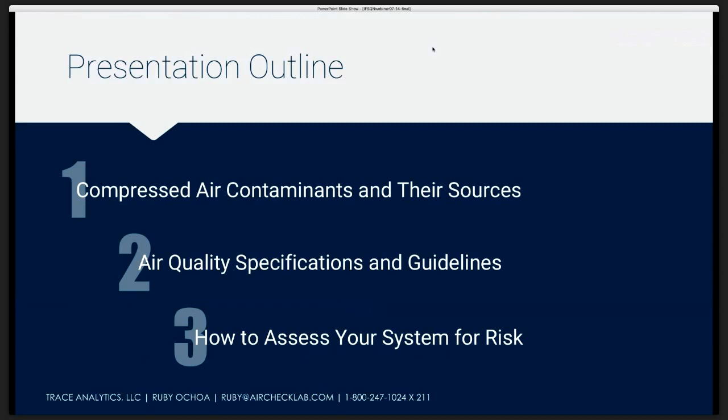In this presentation, I'll be discussing contaminants in compressed air and why they may be harmful to your product, how to use the blank checklist we provided in our download section to assess the hazards associated with compressed air, and air quality specifications and guidelines. As a first step, let's identify the potential hazards in compressed air, the contaminants. A number of components of ambient air become contaminants once they enter the compressed air stream. When a compressed air component has a harmful effect on the product, it's then considered a compressed air contaminant.

So what are the contaminants in compressed air? Both the Compressed Air and Gas Institute and ISO 8573 specify compressed air contaminants. CAGI cites 10 contaminants that typically need to be removed or reduced from low-pressure compressed air used for manufacturing. These 10 contaminants fall into 4 general categories. Particles, which include pipe scale, wear particles from compressor operation, and atmospheric dirt.

Water, in liquid, vapor, and aerosol form. Oil, also in liquid, vapor, and aerosol forms, and microorganisms, which are also described as viable particles. The international standard ISO 8573 is a compressed air quality specification that addresses these very same specific contaminants by providing a range of purity classes for particles, water, and oil. It does not include purity classes for microorganisms or gases.

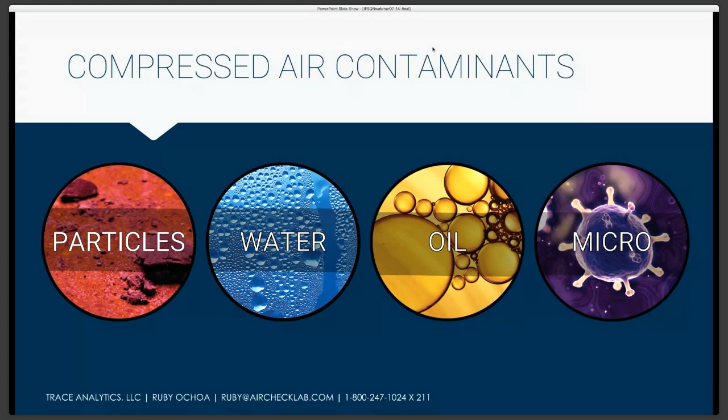So the primary sources of contamination in a compressed air supply include the intake air quality and the compressor itself. Other significant sources include storage receivers, distribution piping, and items that are connected after the point of use filtration, such as valves, gauges, flexible tubing, and fittings. So let's discuss some of these hazards.

Air pollution is not only a public health and environmental problem, it also contributes contamination in the form of millions of particles per cubic meter. These particles consist of acids like nitrates and sulfates, organic chemicals, metals, and soil or dust particles. Coarse particles are between 2.5 microns and 10 microns in diameter. The finer particles with a diameter of 2.5 microns or smaller are not removed by the intake filter and pass right into the compressed air system.

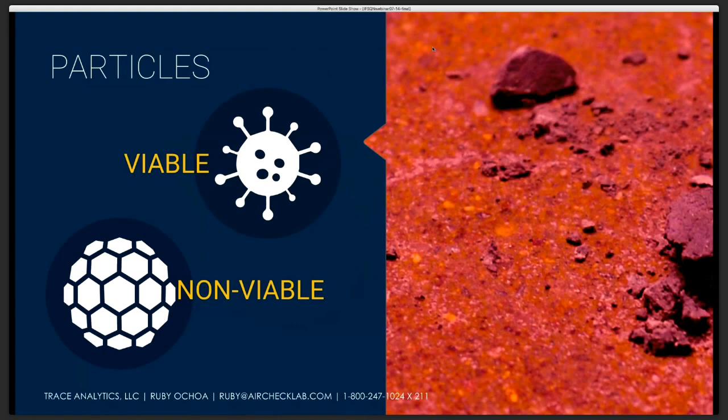Particles can be categorized into 2 different types, viable and non-viable. Viable particles are microorganisms, such as bacteria and viruses. Non-viable particles consist of things like rust, pipe scale, and dust. I'll cover viable particles a little bit later in the section. The compressor can contribute wear particles from its operation. Wear particles can be metallic or polymeric.

Particles can also be generated from a compressed air system that utilizes a refrigerated dryer with iron distribution piping or receivers. The combination of high water and iron will form rust and pipe scale. Using iron piping is quite common in food manufacturing facilities. Aluminum piping is another source, creating fine dust in the form of aluminum oxide. Same thing with copper piping creating copper oxide. Particles can also be generated from a desiccant dryer. That's why a particulate filter should always be installed after a desiccant dryer.

Unions and valving of the piping system are critical in that material used for seals can shed particles and have a tremendous negative impact on air quality. Another source of failure for particle requirements is the use of some flexible tubing in the process line or the sampling procedure. Careful consideration should be given to the type of polymer tubing used because if it's not rated for low particle shedding, many types of polymers like rubber will continuously or sporadically shed significant particles. Some can also allow ambient water vapor to diffuse into the tubing. This can adversely affect the quality of dry air by raising the vapor levels.

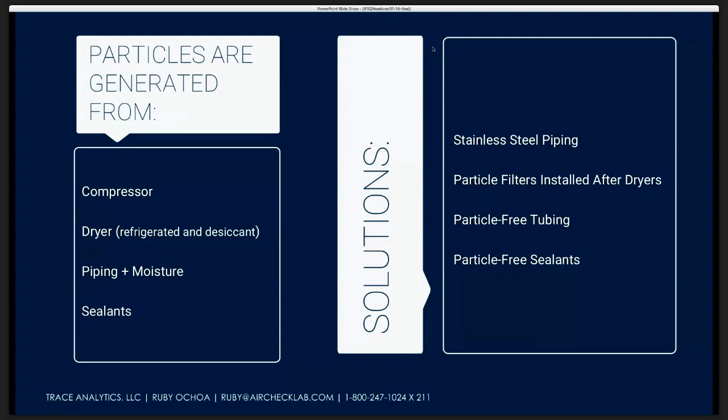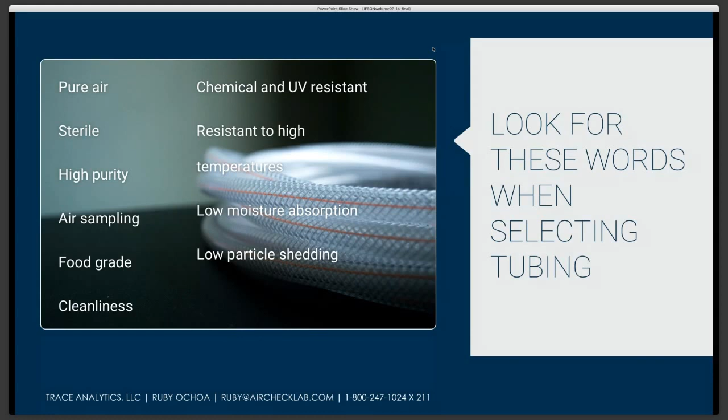There are suitable types of tubing that are designed to have little to no particle shedding or permeability issues. They may not be easy to find if you don't know what to look for. Manufacturers label these types of tubing in a variety of ways: pure air, sterile air, high purity air. Also, you can look for their recommended applications as a key, like air sampling, high purity, food grade, and the properties that are required to keep those particles out include cleanliness, chemical and UV light resistance, resistance to high ambient temperatures with low moisture absorption, and low particle shedding.

You should get your vendor to provide you with the specifications for the type of tubing you're using. And if you are using tubing after the point of use filters, you should check with your vendor that it has the correct properties to prevent contamination of your product.

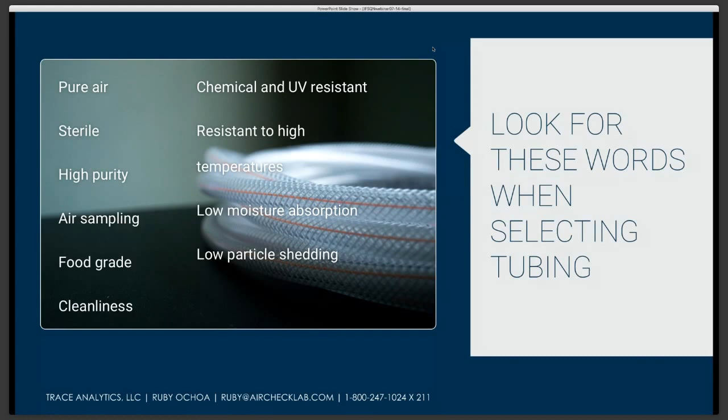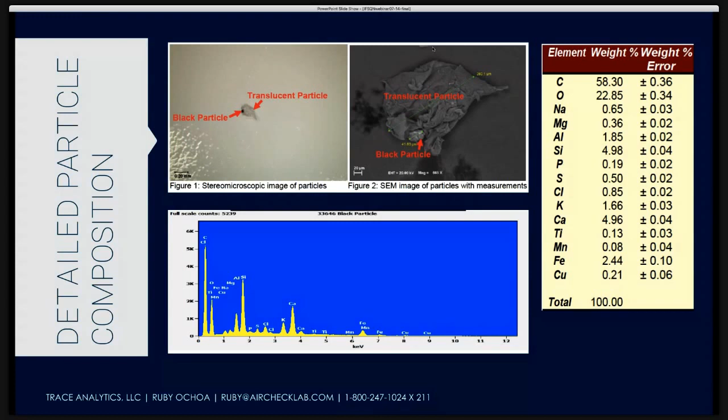We had 2 clients that had this issue within the last month. One of the clients determined that damage had occurred to the filter inside the filter housing. When they opened up the filter housing, there was charcoal all over it. For some reason, they hadn't looked in there during all our troubleshooting efforts. The other just happened last week, so we're still waiting to see what they discovered. Another client also had this type of analysis done, and they determined that it was abraded brass from the piping. So interesting information if we have to go down that road. It is available.

So let's go on to the other potential contaminant, which is water.

Speaking of water, I think I need to take a sip.

Much better. Atmospheric air typically contains 1,000 to 50,000 parts per million of water, depending on where you live. If left untreated, compressed air with high levels of water is unacceptable for critical applications. Excess water will cause corrosion in iron piping and storage receivers, like I mentioned before, and that type of particulate contamination can damage equipment used in your production lines and contaminate the final product.

Drops and dead ends in the distribution piping can trap water and create an environment for microbial growth. Water can wreak havoc on the piping system and cause particulate damage, as I mentioned before, but in a water-saturated system, aerosols can be generated from water collected on piping walls and mist your final product.

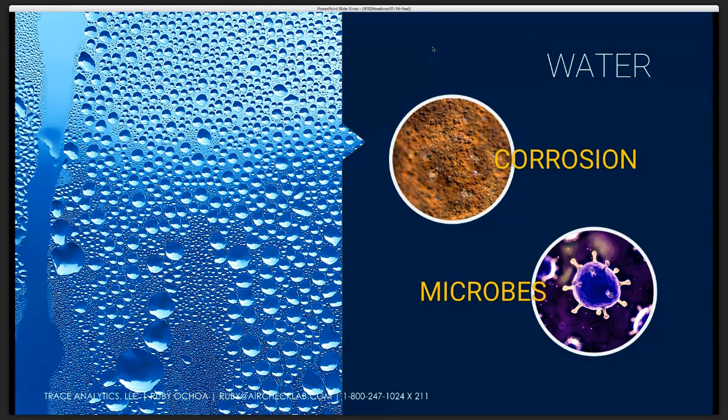Now, the third hazard or contaminant is oil. Atmospheric air typically contains between 0.05 milligrams per cubic meter to 0.5 milligrams of oil vapor. Common sources are vehicle or motor exhaust and industrial processes. There are so many different words to describe oil, it can be confusing. Common terminology includes condensed hydrocarbons, oil mist, oil aerosol, oil vapor, total gaseous hydrocarbons, total volatile hydrocarbons, total halogenated hydrocarbons, and the list goes on and on.

ISO 8573 defines oil as a mixture of hydrocarbons composed of 6 or more carbon atoms. The lighter hydrocarbons with carbon atoms from 1 to 5, commonly called gaseous hydrocarbons or total volatile hydrocarbons, are the ones typically reported for breathing air analyses, and those are not included in this total oil purity limit from ISO 8573.

Most of our clients in food and pharma are always wanting the lowest amount of oil possible. So that means class 1 or class 2, which requires analysis of not only oil aerosol, oil vapor, and organic solvents, which widens the cast of usual suspects to include off-gassing of the more volatile compounds associated with oil, such as organic solvents used to clean piping, threads and glue used to cement connections. Organic solvents, when detected, are reported by the laboratory but are not considered for the pass-fail criteria.

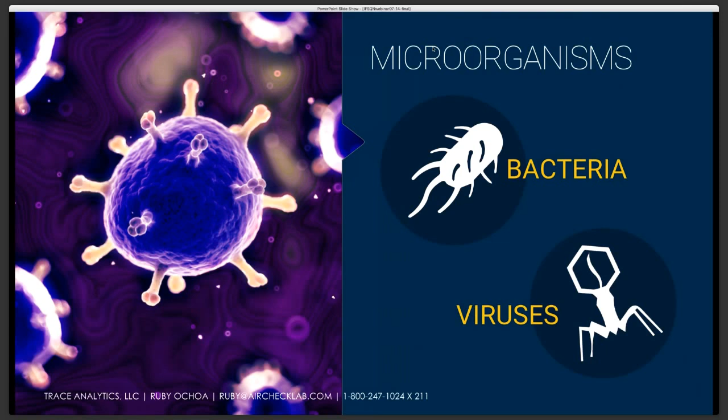However, I'd like to point out that although a desiccant dryer at, say, minus 40 degrees C can inhibit the growth of microorganisms, the dry air does not kill the microbes. Once the microbes are introduced back into a warmer and wetter environment, if they're present, they will begin to grow again. That's why point-of-use filters are either required or recommended for critical control points in the food industry.

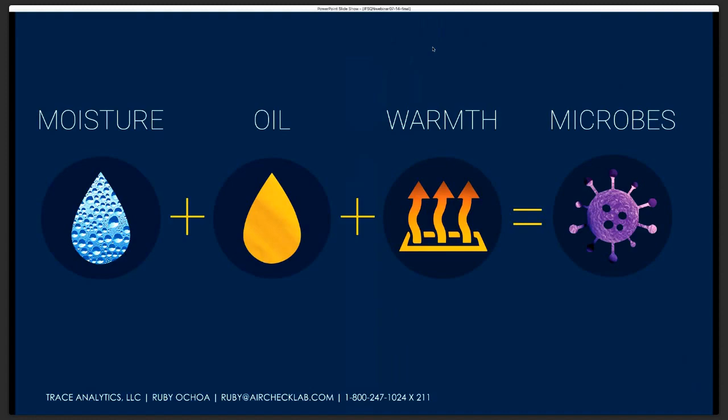So now we've got a poll that we'd like to do. Does your country regulate compressed air quality in the food industry? So mark either yes or no, and if yes, please indicate your country in the chat box. Okay, yeah, I've already set that poll live in the sidebar. Just to reiterate, does your country regulate compressed air quality in the food industry? Yes or no. And if yes, and only if yes, please type your country in the chat box.

Right. So we're looking at the moment, Ruby, about 60-40 in favour. Yes. So have we got any countries? I see Canada and USA. Yeah. Is that lots of Canada and USA? And some flying by as well, Brazil. Brazil, USA. Is that correct? Is compressed air quality regulated in the USA and Canada as such?

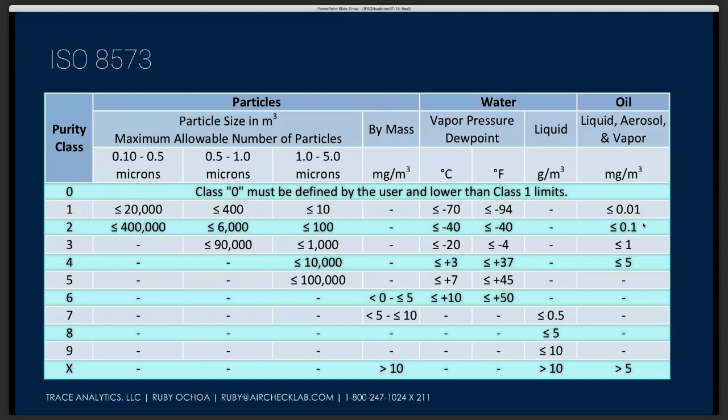Speaking of what a great language ISO 8573 is, here's how to properly designate ISO 8573 purity classes so you can communicate to others what it is you need. The designation of ISO 8573 purity classes includes the specification name, ISO 8573-1, and the edition date. There's a colon and then the version. And then the purity classes are in numbers in brackets. I've used the letters PWO so that you know that's the order they should always be written. So it's always particles, water, oil. We've got some examples at the bottom.

What? I'm sorry. I got distracted. I apologize.

There are some examples for direct contact with a class 2:2:1, indirect contact 2:4:2. And if you're going to eliminate one of the contaminants and not test for it, you just put a dash. We have a more detailed document that discusses further designations, but for now we're going to move on.

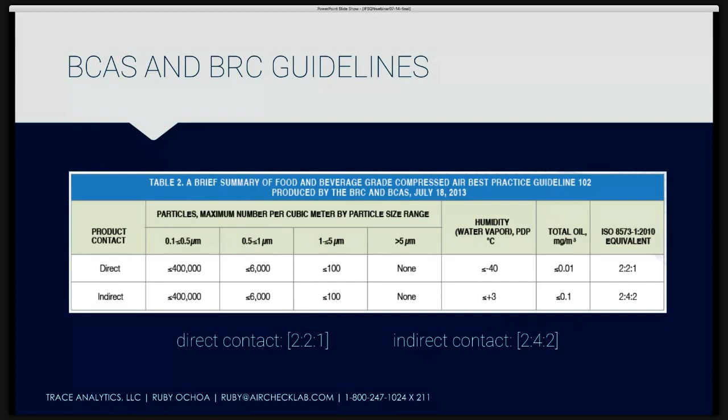Oh, looks like we have another poll. So, do you currently test your compressed air quality? Yes, if you're using ISO 8573 standards. Yes, if you're using non-ISO 8573 standards. Or no, you're not testing compressed air. I invite you to vote in the poll. Question, do you currently test your compressed air quality? Yes, against ISO 8573. Yes, against non-ISO 8573, or no, not at all. Okay, and it's looking like around 60% do not test the compressed air at all, and then 20% do use ISO 8573 and 20% do not.

Okay, that's interesting information. Yeah, good information to know. Okay, move on then, please.

Okay, so now let's discuss how to assess the risk of your system. Generally, the steps needed to assess the risk of product contamination are as follows.

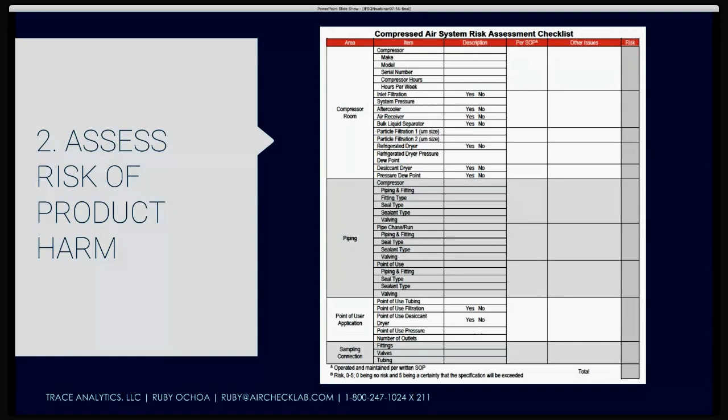The following checklist can be used to assess the health of your system. The blank checklist helps you document information about your compressor, install filtration, point of use, and sampling port connections. Once you have this information, you assign the level of risk for each element with a numerical value, with 0 being no risk and 5 being certain risk.

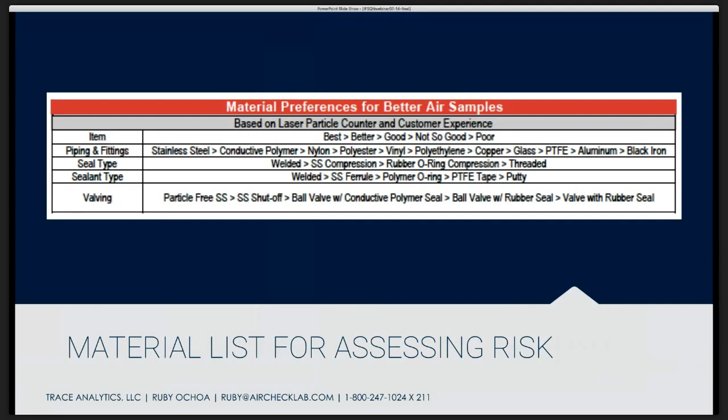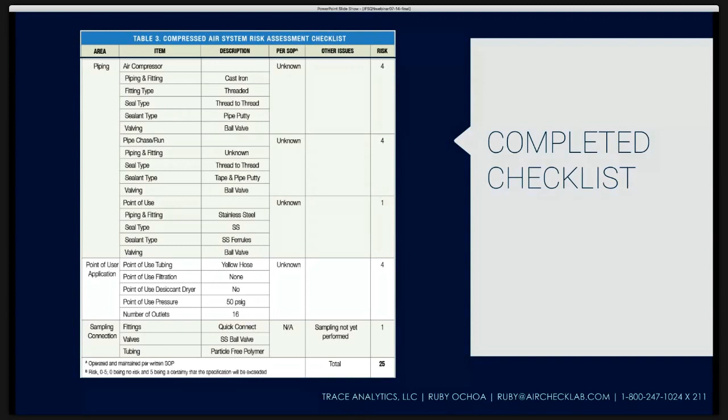Because there are various types of piping throughout after the main filtration and a refrigerated dryer with no point of use filters, there is a high risk for contamination from rusty particles and microorganisms. So use that list to assess your system, and then that will be part of your process in figuring out what your limits should be and what your risks are.

After assessing a risk across your entire system, you have to synthesize this information with the needs of your particular products. Determining specific limits is key to the rest of this process. Without setting specific limits based on the risk of product harm, you cannot adequately assess existing controls, assess if extra controls are needed, or determine an appropriate monitoring plan. SQF, FSMA, and FDA state that you need to set limits.

But in our experience, we are finding that customers don't have enough information to do that. So they frequently default to not setting limits, but instead doing a diagnostic test where we tell them how their system is currently performing. Then, armed with that information and sufficient data points, information from that risk assessment, which will tell them what kind of filters they have, they're better able to determine what limits are most practical for their facility.

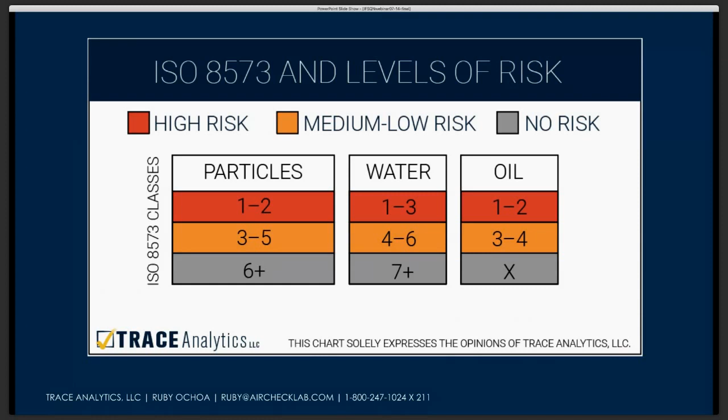Now that you've assessed your risk and established limits, you're ready to begin testing to see if your current controls are performing to the standards you've just determined. What do you need to establish a monitoring program? First, you have to answer a few questions, like, where do I test? Results from air samples should be representative of the air used on your products. Try to capture samples as close to the point of use filtration. Identify any critical control points. Take sufficient samples that cover all the variations in your air system. In other words, old piping versus newly installed piping, furthest distance from the compressor, facility variations, outlets where piping goes outside of the building and then re-enters the building, filtered point of use versus non-filtered.

So how many samples should you take? There are different answers depending on what you're trying to accomplish. We know that current SQF and other certification requirements will accept 1 sample annually. From our experience, FDA auditors expect to see more data from throughout the facility that includes all product lines. To determine if compressed air quality is in a state of control throughout the year, 1 sample is not enough.

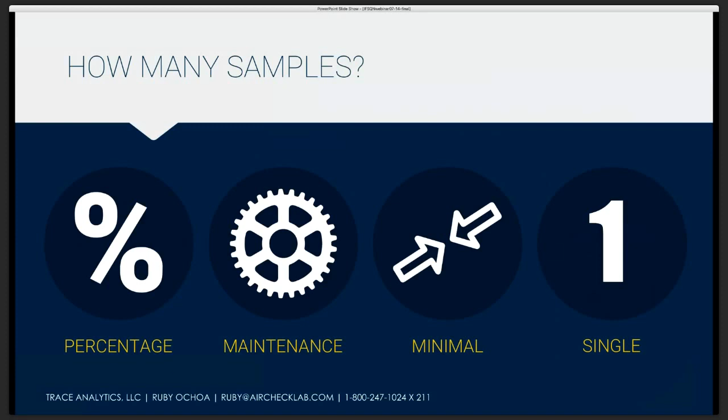And the last question is, how often do you need to test? Your options are annually, semi-annually, quarterly. While taking samples once a year is convenient, we think taking samples at various times of the year is a better gauge to assure consistent air quality. BCAS's Food and Beverage Best Practices Guideline recommends semi-annual testing and anytime major work is performed on the compressed air system.

Quarterly trend analysis can provide useful information on the state of compressed air quality at various times throughout the year. By noting filter changes, compressor maintenance, both routine and emergency, and sampling dates, you can track the quality of your compressed air by outlet or by product line. This frequency can then be reduced once you have sufficient data supporting consistent air quality.

Reviewing the results of your air test will provide the information you need to assess if your controls are adequate. If samples fail to meet your established limits, you will need to either reassess if the limits were set inappropriately or add additional controls, such as point-of-use filters. If controls are inadequate to achieve the desired air purity rating, additional controls obviously are called for. For instance, you add controls where none are in place, like adding a refrigerant dryer where there is none, or add controls to existing controls, like adding a desiccant dryer to a refrigerant dryer.